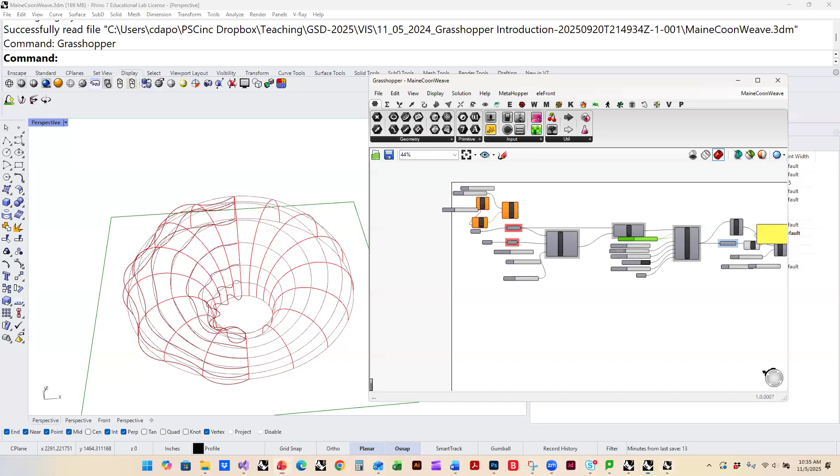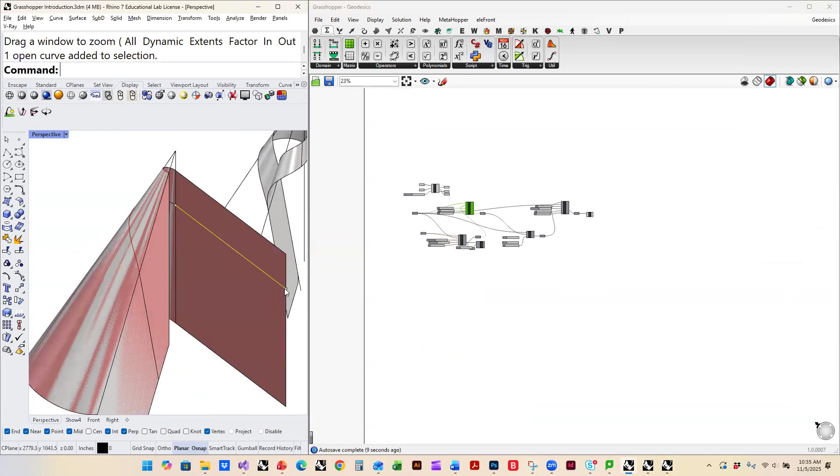But just so you know, as you're looking into this, we do have certain tools that will help you in that regard. For example, we have tools that will do this sort of thing. This is like a long strip of joined surfaces, and this is a tool that is mapping the geodesic tangent curve dynamically on it. So you can make sort of geodesic strips in that way.

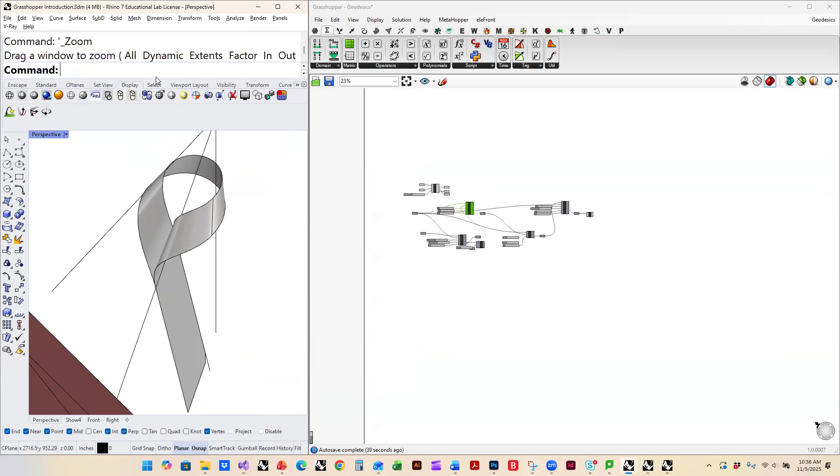I don't think you need this yet for your material test. The difference is if you're using a big sheet material and cutting it into a funny shape, it unrolls into a funny shape. That is a different process than if you're using a linear strip that rolls up on itself. So we have these tools. We also have tools that will map skinny strips onto surfaces. So it's a new type of model.

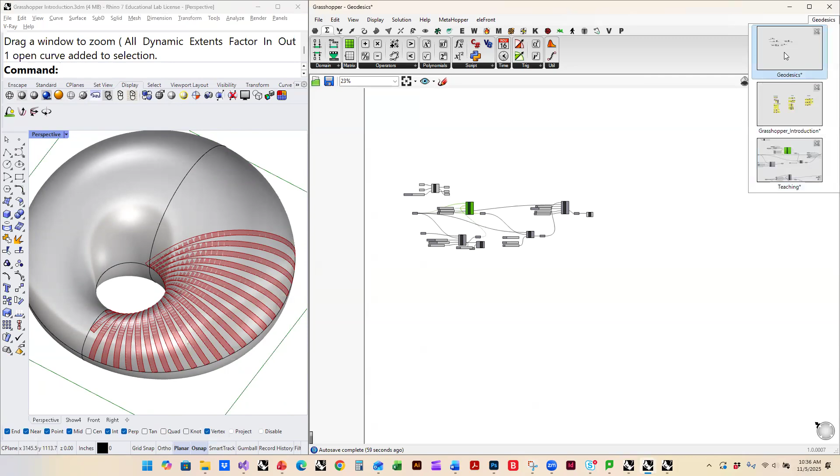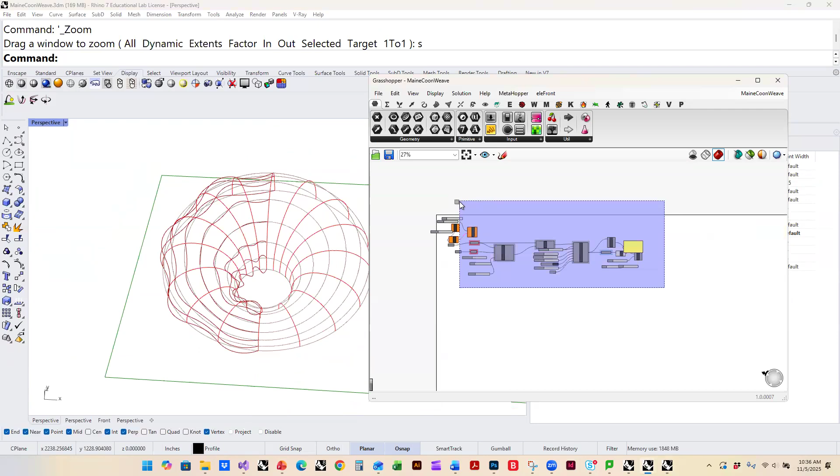And we also have another tool here. If you have something like this, which is a principal curvature panelization of an asymmetrical torus, I have tools that will take a set of curves in one direction and a set of curves in the other direction, and they weave them throughout each other so that we can make spatial woven models like that. We can make models where we have two things weaving amongst them and predicting the length.

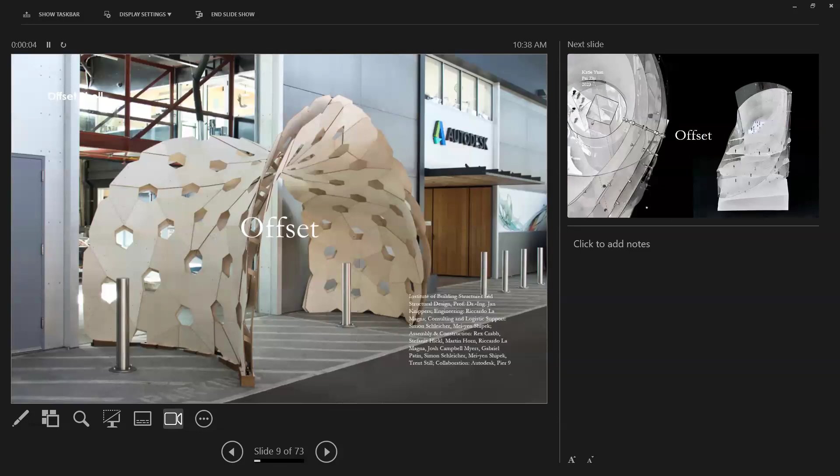So I don't think any of that is necessary yet. It requires the next step of the computational thing that I want to go through with you. But if you're working with skinny material, we do have tools to support you rather than only the sheet material. Okay, so that's that. And as I was saying, just a reminder to go back to that lecture and look at the paradigms as you're thinking about what you're working in. They are really detailing vocabularies, things that your predecessors have done, so that we know somewhat how things are going to respond.

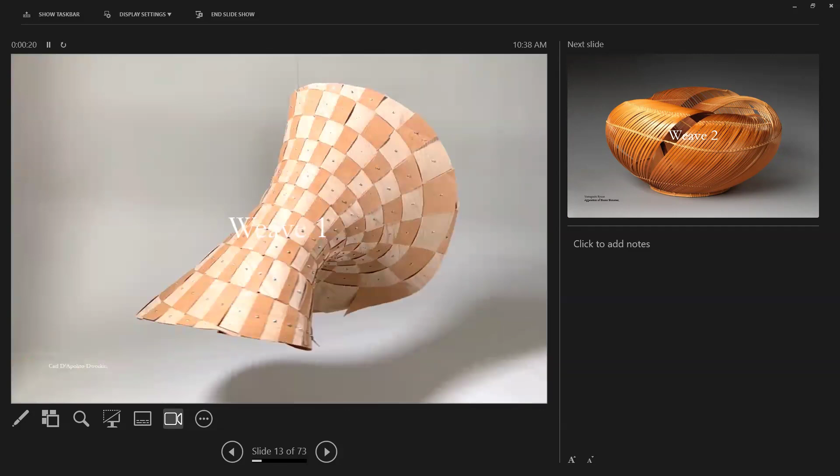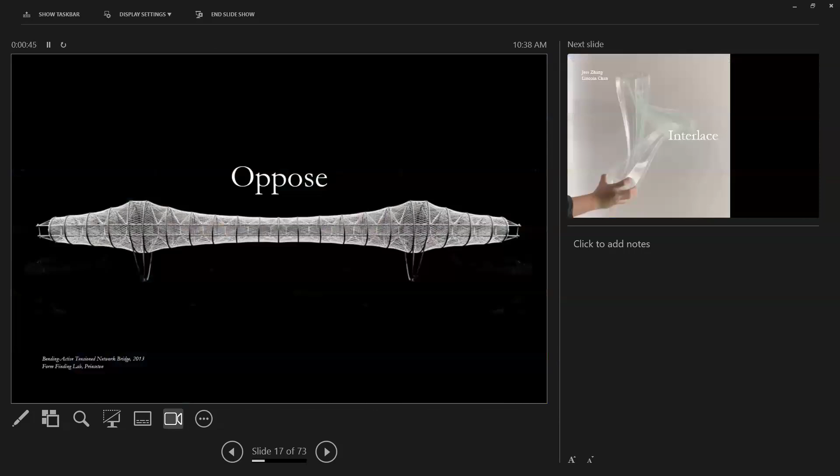In the weaving paradigm, there are really two kinds. One is this kind: strips that widen and shrink, made using the principal curvature. The other kind, which we've never made models in but which is the traditional kind, is where the strip is of a single width. That is a new kind, and we need the tools that I've just developed for that. So just a reminder, these are the various paradigms, and you should be responding to and working within one of those particular paradigms. Okay, that's my brief introduction.

Okay, so now please download the Grasshopper introduction and the Grasshopper modeling file. Just a tiny bit of background. I'm a competent, and also very amateur, mathematician and programmer. I'm entirely self-taught. Some of you have had courses in this, and if I say something that is wrong, I'm perfectly happy for you to interrupt me. A few of you I know have background in this.

That's fine. When I was a little boy, I studied programming a lot in my spare time, and I forgot all of it by the time I got to graduate school. But this one concept has been important to me in understanding what was going on: the idea of object-oriented programming. Most of the languages that we use, C++, Java, C#, Python, are OOP languages. They work around the concept of classes. You write a class, and a class has properties which store data, and methods which act on the data, and it hides its internal functionality from everything else.

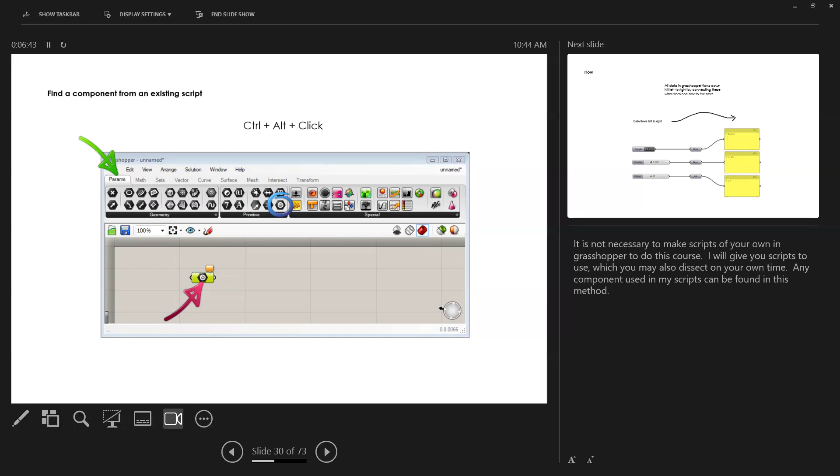Okay, so this is, of course, the interface. You've all seen this a million times, but one thing that I think is useful is if you go Control-Alt-Click, it will show you where a node came from. The file that I gave you today is almost everything that I use on a daily basis. And if you want to find it, you can Control-Alt-Click on it, and it will show you where it is, okay?

And then the other thing, many of you know this already, everything flows from left to right. And there are certain parts to a script, which in Grasshopper I think are called parameters and components. That would be analogous to the properties and methods. A parameter stores data, a component executes some kind of a function. There are inputs and there are outputs. And really, Grasshopper, when it was first developed, used to be called Explicit History.

So really, it is just a duplication of all the Rhino functionality in a more explicit way. So essentially, you're not really learning to code, just learning to do Rhino all over again from scratch. Okay? It's just a completely duplicate version of Rhino, except now all of the steps are recorded.

So if you want to make a sphere, when you execute a command, you click somewhere and then you type in a radius. Same thing. You have to click somewhere. The point is the place that you would click. The radius is 100. And so you just have to look at the inputs, and those inputs basically match up with the steps you would take when you would execute a command. So you just have to relearn all the commands.

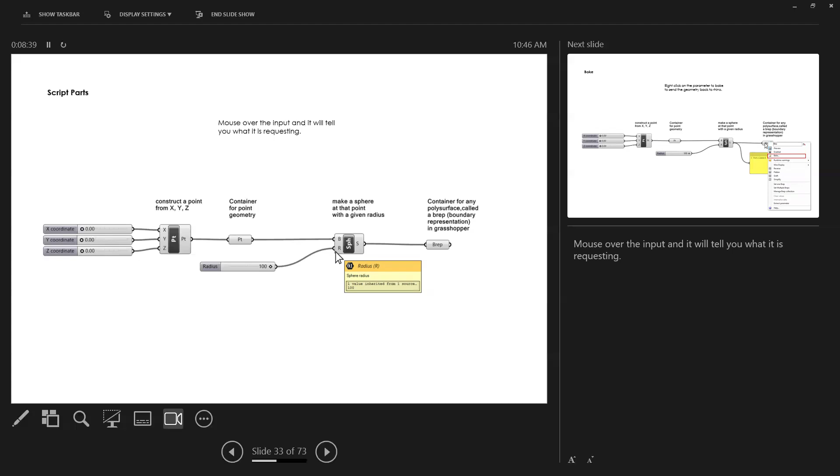And sometimes when you execute a command, you execute it very intuitively. You don't really know all the steps that you're doing. And now you have to know all the steps that you're doing, and you have to get the information that you would need to do it. And if you mouse over one of the inputs, it will tell you what it's asking for. It's asking for the sphere's radius, and it'll have this little icon which tells you what kind of data it is asking for.

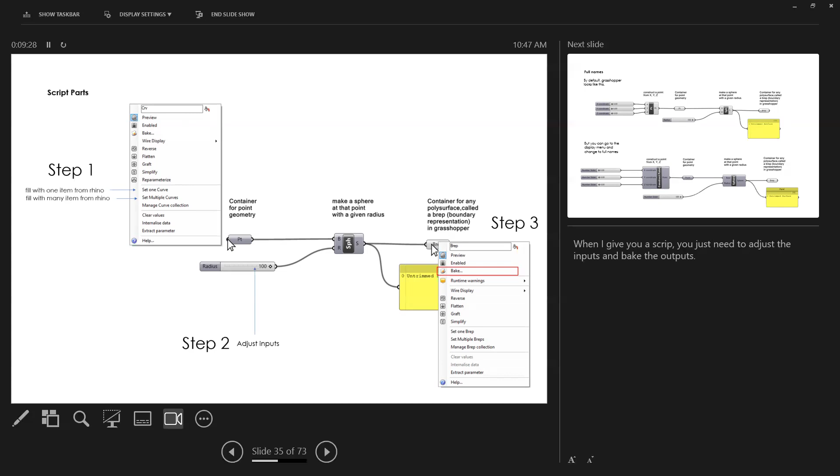And then, you bake things out, or you right-click on a parameter. Parameters will either take information generated by Grasshopper, or they will take information from Rhino. Once you put something in a parameter, Rhino and Grasshopper are totally separate. Rhino has data. You take one of those data, load it into Grasshopper. Grasshopper does a bunch of shit. Then you export it back to Rhino. So the Rhino model is just there to load some information into the Grasshopper process. So you can right click on this and you can set one, or you can set multiple into the parameters. Okay. So that's basically how it works.

So I do this long Rhino tutorial, which I've been doing for decades. And it's very similar to this, although I've tried to do this many times. Sometimes it gets confusing. Please interrupt me. Please try to follow along. I will try to go slow.

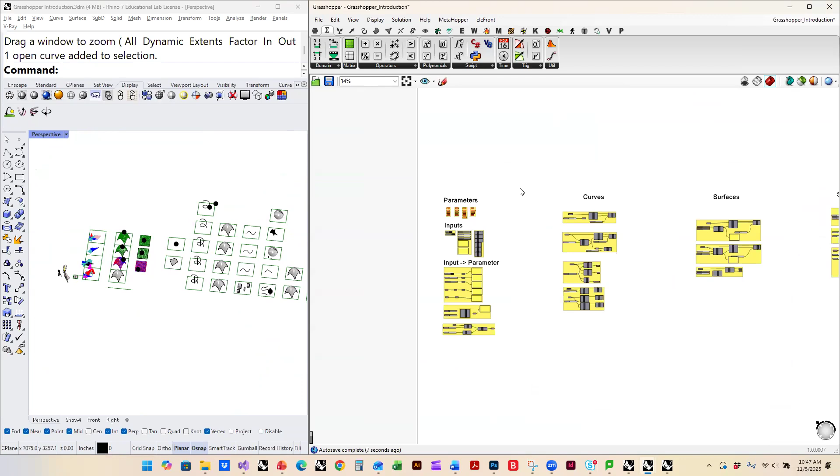Okay. So in the Rhino file that I give for my Rhino tutorial, there is just every command that I use. And this is sort of the same, but not the more complicated things. This file is just all of the nodes that I actually use. So if you alt control click on one, it'll show you what it is. Okay. So these are the parameters.

There are these number parameters: a Boolean, a true or false, an integer, obviously, this number, which corresponds to double numbers in computational language. It's a real number with decimal points, 0.11112 or whatever. And then a domain, which is a range from something to something else, 0 to 100, 0 to 2 pi, a range.

And then there are geometry parameters, and those are split into two categories. There are the ones that are more mathematically defined, like points, vectors, planes, and lines. Those have a simple mathematical definition, and Grasshopper tends to be fast working with them because they don't require a lot of data. A point is really 3 numbers, an x, a y, and a z. A vector is also 3 numbers, an x, a y, and a z. A plane is 6 numbers. It's the normal and the location.

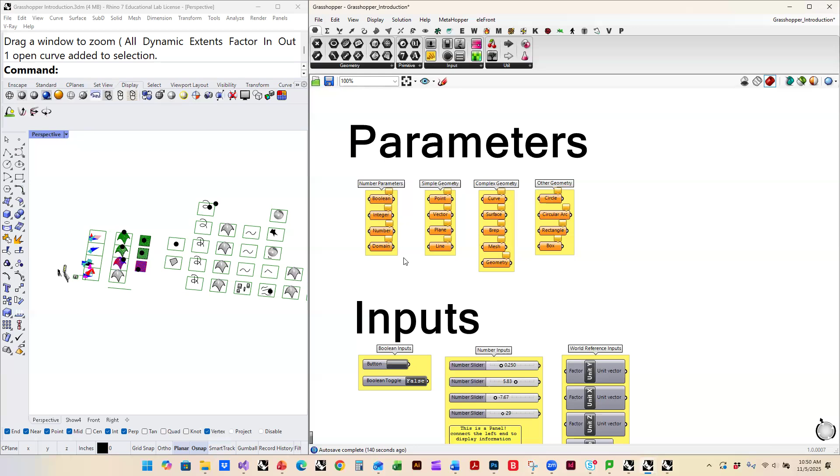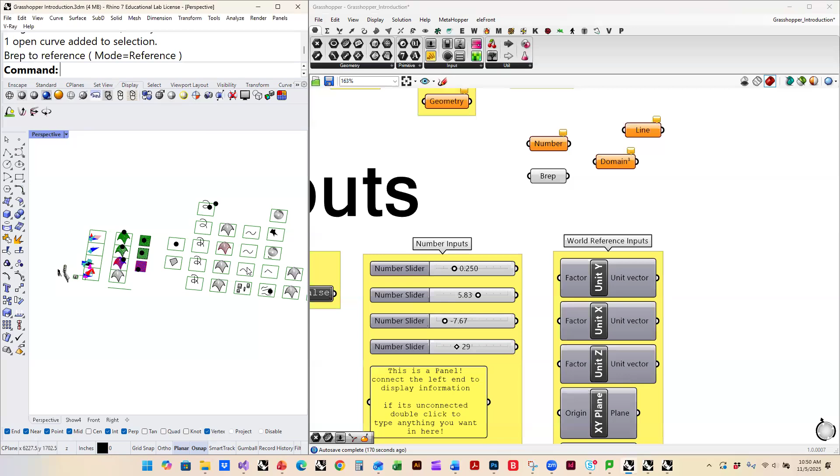Okay. Then there are inputs. So when you want to make something, you just double click and type it in. You say number, domain. There's a lot that come up though. So line, sometimes you get the wrong one. You have to know which one you're looking for. Brep, and they come up. Okay, and these are the things that you right click, set one brep, and load it from Rhino. And so these are the parameters, and they are the ones that get data from Rhino.

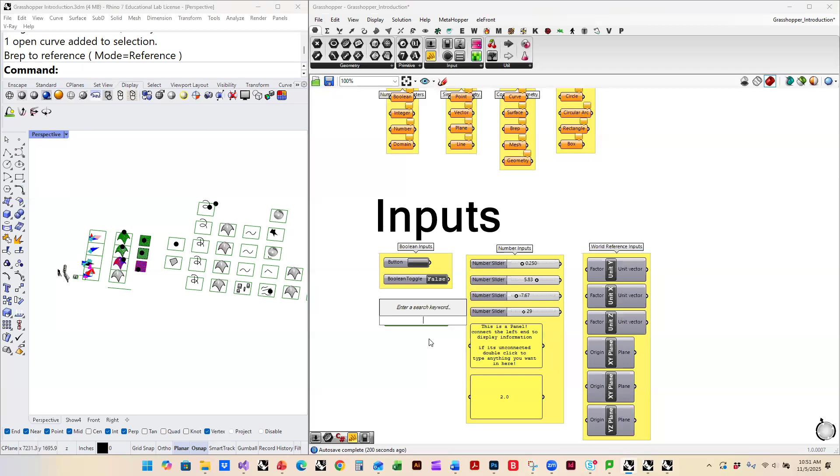And then there are other kinds of inputs that come directly from Grasshopper, and these are the only ones that I ever really use. There's Boolean values, true or falses. They turn things on and off. So if you type bool, you'll get this Boolean parameter, which holds a Boolean value, or the Boolean toggle, which can input a Boolean parameter. So if you double click on this, and then there's also buttons, which instantly turn on and off.

And then over here, these are kind of the world reference coordinates. So the unit X, the unit Y, the unit Z, the unit XY plane, the unit XZ plane. I use these a lot because they're helpful shorthands. If you want to move something vertically, you would need to get the world unit Z. It sort of maps onto when you type into Rhino move vertical, you need a reference. And then those are just if you type unit X, unit Y, or world XY plane, XZ plane. Okay.

And then there are the number inputs, which are typically in sliders. So if you type number slider or it's slider, I don't know. I don't usually access it that way. I usually just type a number like 10.00, which will give me a number, or if I type an integer number like 25, it'll give me an integer slider. And if I right click on this and go edit, I can change the maximum and the minimum, and I can change whether it is a real number with decimal points or whether it is an integer without them. And I can also change the number of decimal points that it will store.

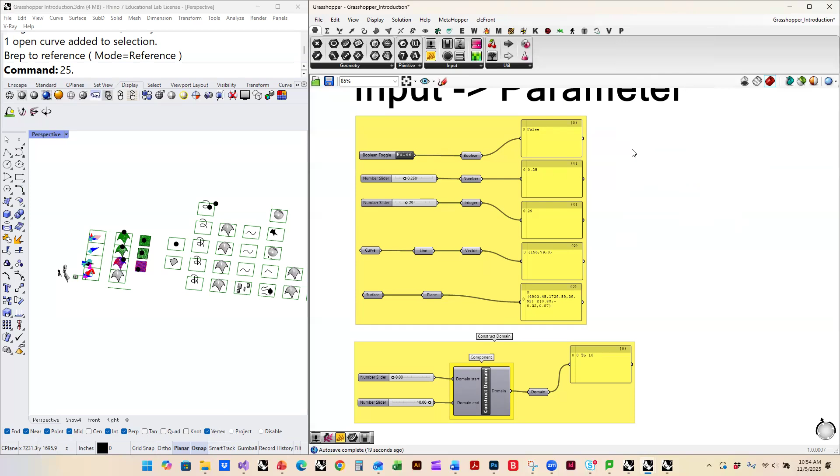And also, sometimes it will cast things automatically for me. Like if I draw a line in Rhino, and then I make a curve, and I put that line into the curve, because this is a linear element, it will let me cast that to a line, and it will also let me cast it to a vector. So sometimes that will not work. If it doesn't work, it will give you something red. And then if you look in this, you can see it's changing the data type as it goes along. This is a referenced line-like curve. Here's a line. Here's the vector that came out of the line. Some things you cannot do that with, and sometimes the casting is automatic.

So this goes back to what I was saying before. A curve is a type of object of class curve. A line is a different type of object, and changing one into another is called casting. When you're writing programming, you cannot cast anything very easily. When you are doing Grasshopper, a lot of that functionality is already built into the program.

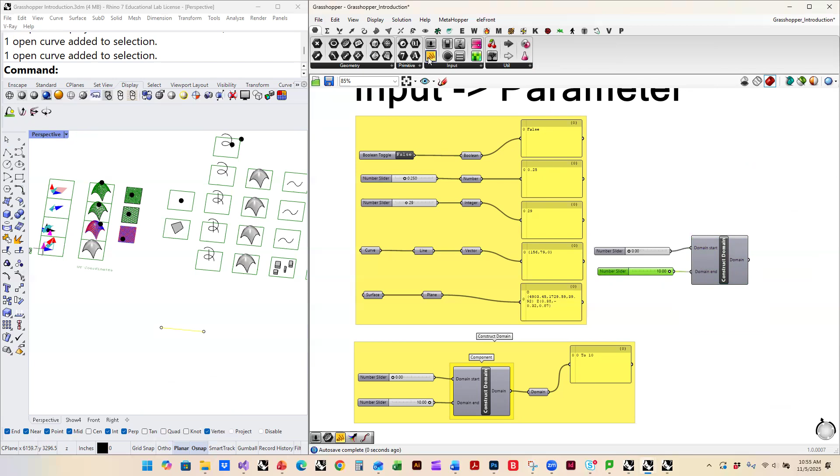If you want to make a domain, you would do domain. There are many kinds of domains. I want to do a 1D domain, which is this one. And then it asks me for a start and an end value. So I would type 0.00, and I would type 10.00, and I would put that in. And then if I look at the output, it will tell me it is 0 to 10. These domains tend to be very, very helpful.

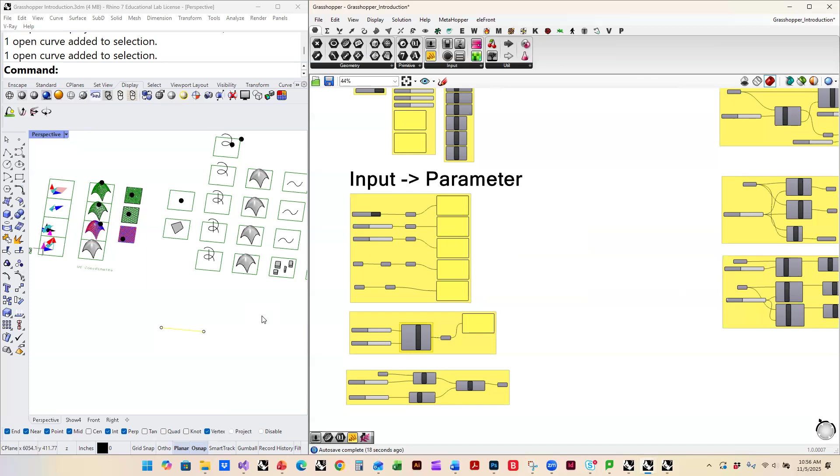If I wanted to model something very basic, let's say like a sphere, I would start with something from Rhino. So if I type sphere, there's the command for sphere. There are many different kinds. They correspond in many ways to the Rhino commands. This would be the sphere center point. That would be the sphere 4-point. They're very similar to the Rhino commands, although not identical.

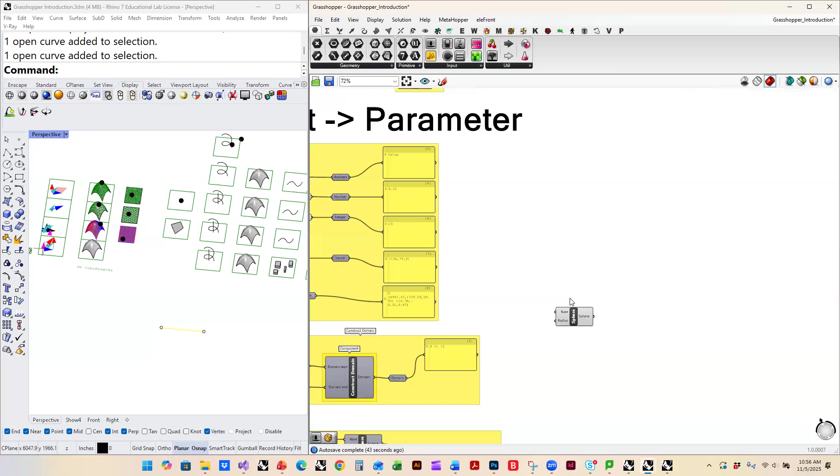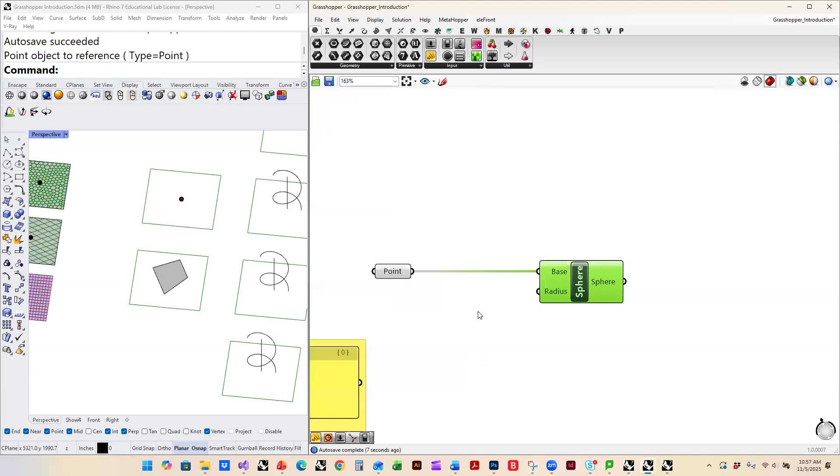There, it's asking me for the radius, and it's asking me for the base, which is by default the world XY plane. But I could type point, and I could choose a point from Rhino, and then I could move that into the base. It will automatically cast it to be the horizontal plane. If I wanted to specify a plane, I would have to do something else. And then I type a radius like 100, and I put it in here, and it does that.

Okay, so basically I need to look at what inputs it's asking me for, and I need to figure out ways of getting them. I could get them in some other way. I could build a point in some other way, or I could take a point from something else. Like, let's say I have this curve already in Rhino. I could do endpoints, take the start point, and then build off of that.

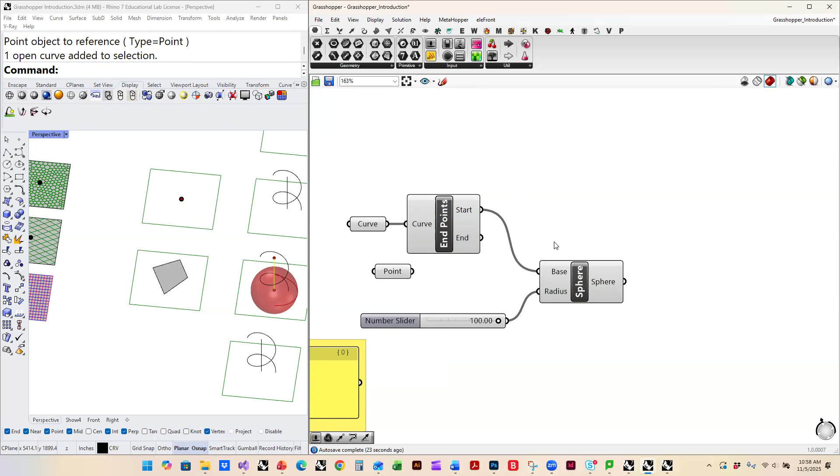So I need to find some way of getting the inputs for each of the commands that I want to do. And the way that I set that up has a lot of influence on whether or not what I'm doing is at all useful for me. It gives me control over what I am doing, basically how I set that up.

So the rest of this now is divided into a variety of different sections: curves, surfaces, series and range, selecting, vectors, planes, transformations, and polysurfaces. These are all of the basic commands that I execute on each of these different things. So I'm not going to get through all of this today, but

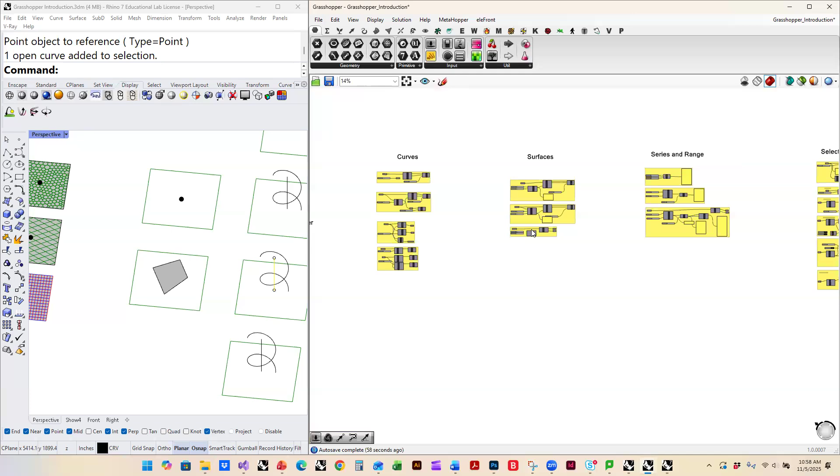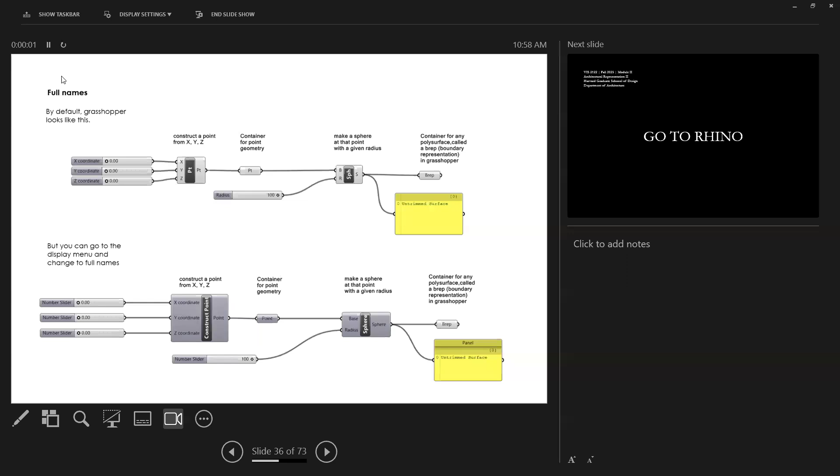very importantly, one other concept that is essential is, I think, thinking about parameters. Okay, so this word parametrization, or the word parameter, has many different definitions and is used sort of interchangeably. But essentially, this idea is extremely important. A surface is actually a map from 2D to 3D space.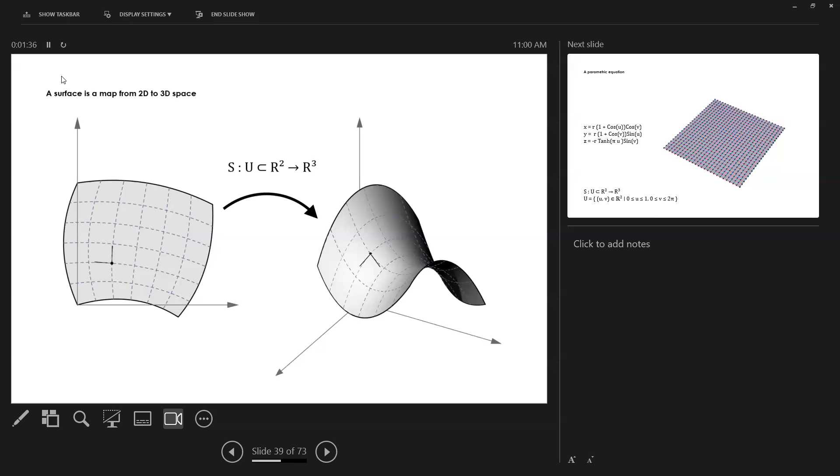So that is what a parametric equation is, okay? It is a map from 2D onto 3D. It is a way of mapping information. The U and V coordinates are 2D coordinates mapped into 3 coordinates in space like this. So U and V are the parameters of the surface. And this is a parametrization of a surface. U and V are 2D coordinates that give you a position in 3D space through this function.

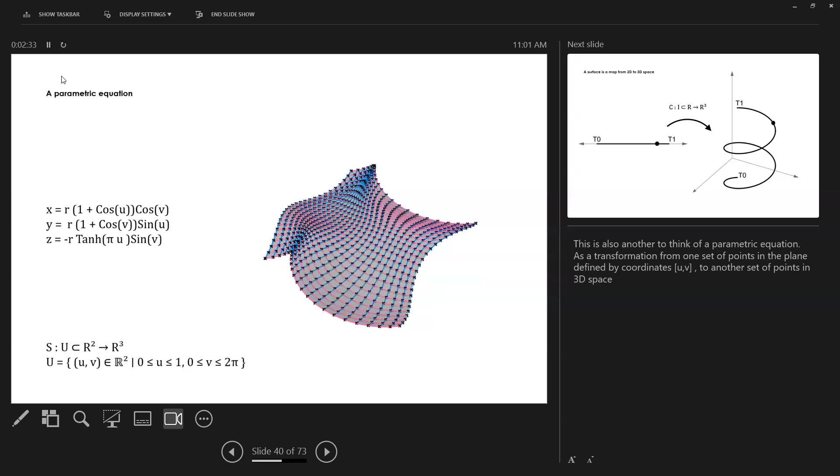Okay, I don't know if that doesn't make sense. It's fine. But it's very important, and we return to it again and again. This is the fundamental idea. U and V are coordinates in the 2D universe of the surface. And then the surface is embedded in a 3D universe. And the same is true for curves. Curves are a map from a 1D universe into a 3D universe.

So curves only have one parameter. Instead of U and V, they have T. And T has a domain. It includes some set of numbers along the number line. And that is mapped into 3D space. So if you want to know the position along a curve, you just need one number, the parameter, to find a position. So this is a parametric equation for a curve. It is based on one parameter rather than 2 parameters, U and V.

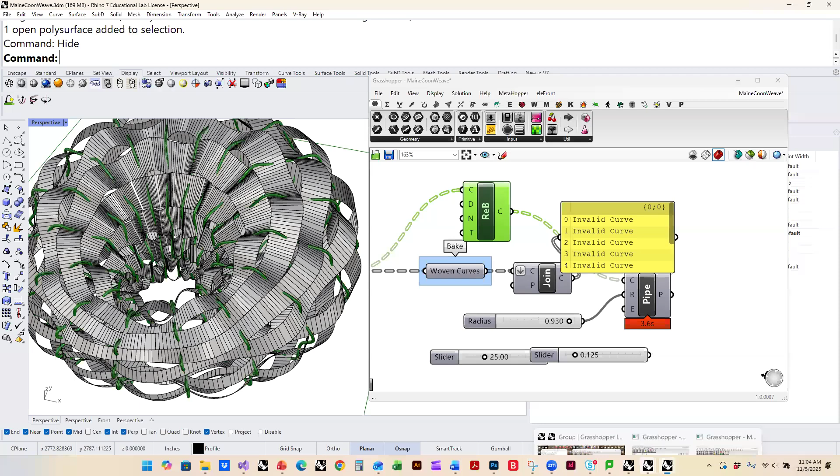It will not show the numbers. I wrote the numbers on this slide. It's very, very useful. One of the things that is weird about Grasshopper is you kind of have to learn some funny things that don't seem that useful.

But if I take a curve, let's just do this. I go curve, set one curve, and then the thing I always do is evaluate curve. This will take the curve and it will take a parameter. So let's put a parameter in here, 1.00, and drag that here. This now gives me a point and a tangent along the curve. This is almost always the first thing I do.

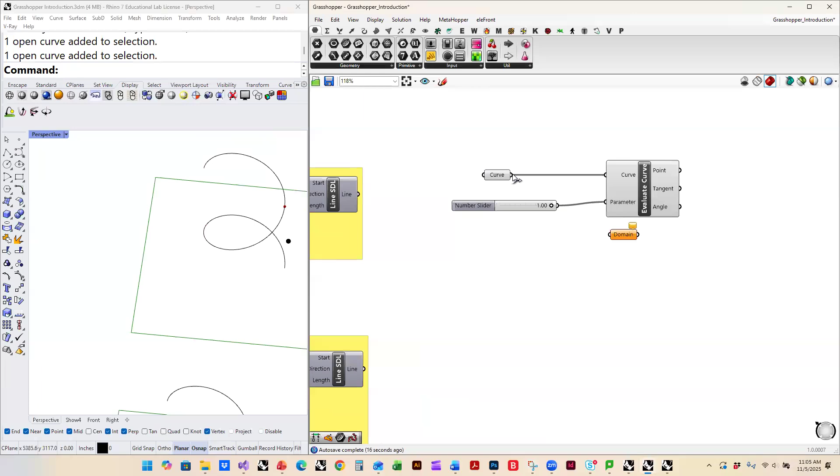But if I drag this slider, it didn't get to the end of the curve. It went from here to some random point. That's because of the addresses of the curve: if I were to type domain and look at it in a panel, it's from 0 to 1.5. If I click reparameterize, now it's from 0 to 1, and this will go along the entire curve.

So if I wanted to make a sphere along this curve, I could give it that point, give it a radius, and drag this along. Otherwise, I don't know what numbers to enter in order to find a particular position. This reparameterization, by the way, is slightly inconvenient because certain areas of the surface will, yes.

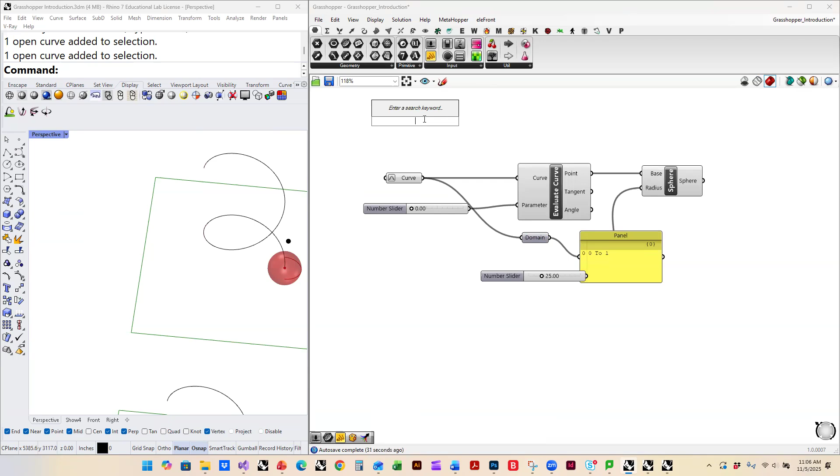Thank you. I just double click and I type. Please, it is not humble, it is heroic, because everyone needs you to ask the question. Nobody wants to, okay? So yeah, you just double click and type a thing in, which is tantamount to entering a command in Rhino and letting it try to guess what you're trying to type. It is a completely analogous process.

You right click on it and go edit, and then you can change the maximum, the minimum, the kind of number. N is an integer, R is a real number, and the number of digits is the number of decimal points that it will hold. If I were to type a bigger number, it will automatically try to guess what range of numbers I'm interested in.

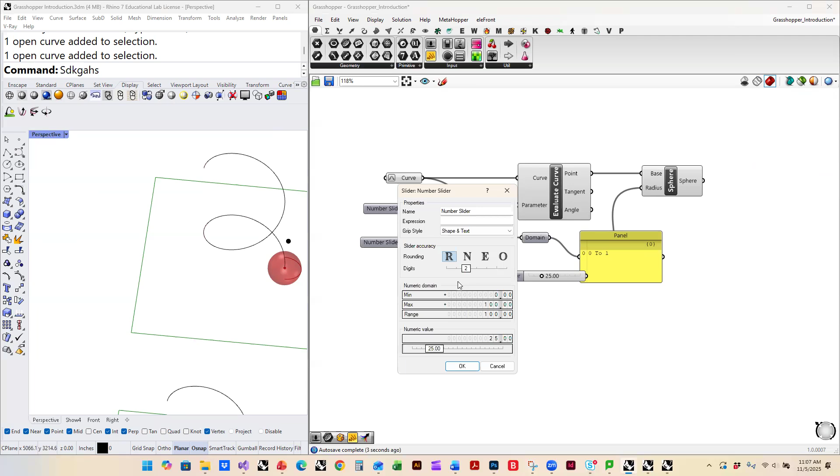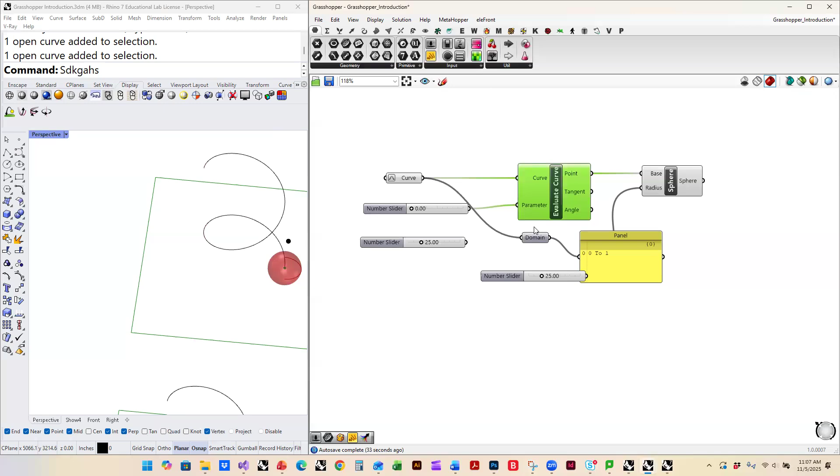So this is the main idea. This idea of parameterization is the fundamental concept. When you were working with parametric equations, that is what they were doing. They were mapping a certain domain of 2D space into 3D space, giving you an address signature on the 3D surface for all the points. Okay? And for curves, it's 1D.

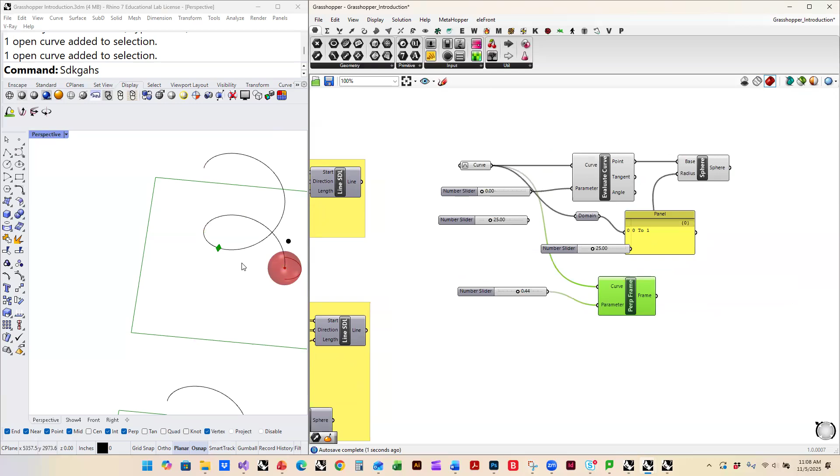And there are others that I use. I also use this perp frame, which also takes a parameter. The perp frame component gives me a little plane perpendicular to the curve. There's also the curve frame component, which gives me a frame, a little plane lying in the plane of the curve, like that.

Then I will also often use this tangent. If I want to draw a line that is tangent, I always type SDL, which stands for start direction length. It's a way of drawing a line. The other way is the basic line, which makes a line between 2 points. This uses a direction and a length.

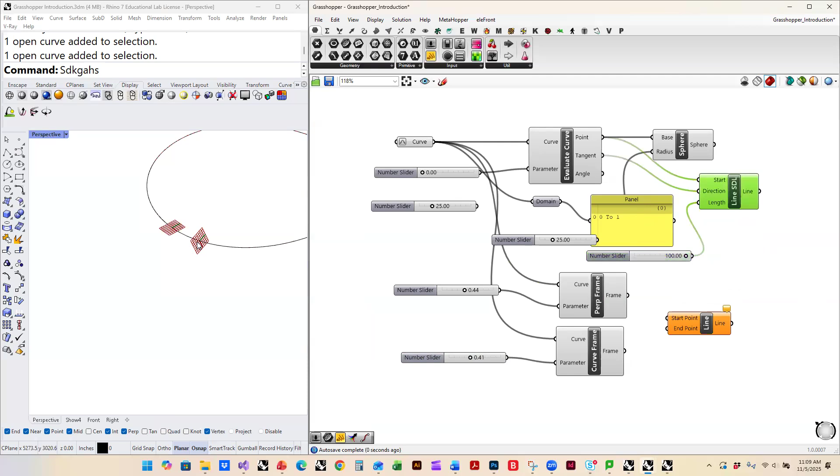I will take the start point, take the tangent, and also put a number slider in, let's say 100, into the length. Let's turn off this sphere. If I want to hide something, I can middle mouse click and put the little blindfold on. And now you can see this is a tangent line to the curve.

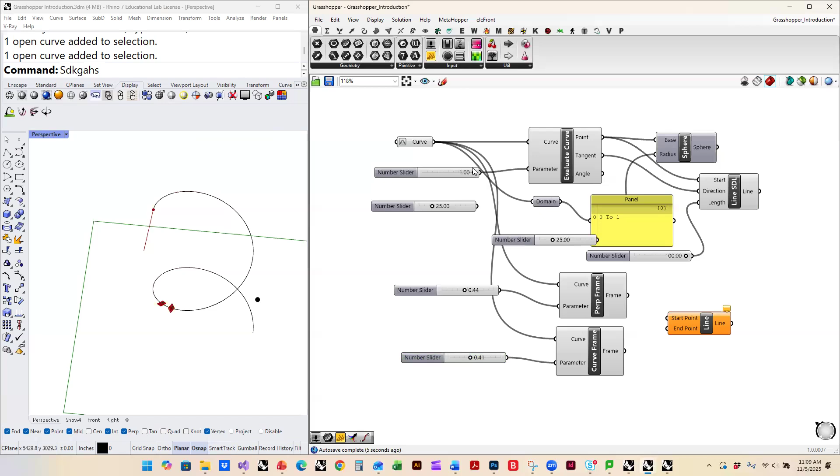That is line SDL. It takes a vector, the direction, start, a point, and a length, a number. And it produces a line. And because the line was created, the tangent is being evaluated by this curve evaluate component. It's tangent to the curve.

Another thing I could do is divide the curve into a certain number of points. So let's clean this up a little bit. That would be this divide curve. There's a bunch of them: divide curve, divide distance, divide length. They have different things. Divide curve.

If I mouse over these things, it says it takes a curve, takes a number of segments, and then this is often unnecessary. So I'm going to drag the curve in here, and you can see it created a bunch of points. And if I change that number, let's make 25, it'll make more points. And this gives me some different outputs: again the points, the tangents, and it also gives me the parameters.

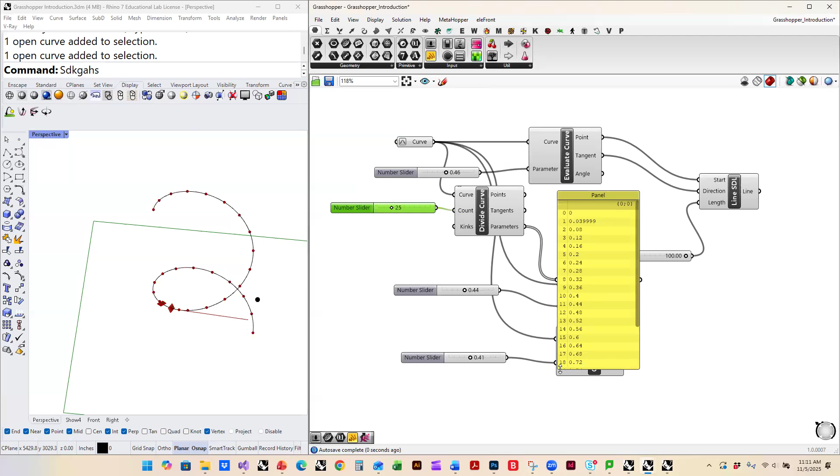So if I look in those parameters, they will give me a long list. So there they are: 0, 0.08, 0.12. And so that is how I made that other diagram. I just took them from here and wrote them on there. And if you wanted, you could use all of these parameters to do one of these other components. I could drag these parameters over here into the curve frame, and it would do the same thing. Yes.

I just go delete. The delete key. Although, by the way, sometimes it breaks and it won't do it. And I think there's a delete button somewhere. Does somebody have it? I'm just doing delete. I feel like there's a delete in the menu. Here it is, delete. You can delete that way too.

Okay. So what's useful about Grasshopper is that rather than me having to execute the command 25 times, it runs this component on every single number that I give it simultaneously. It does the same functionality that it did on one number, but on all of them. And this is what's called a list. The hard part is getting the lists to match up with each other. It's very confusing, and causes things to crash because it's trying to do an operation 25 times.

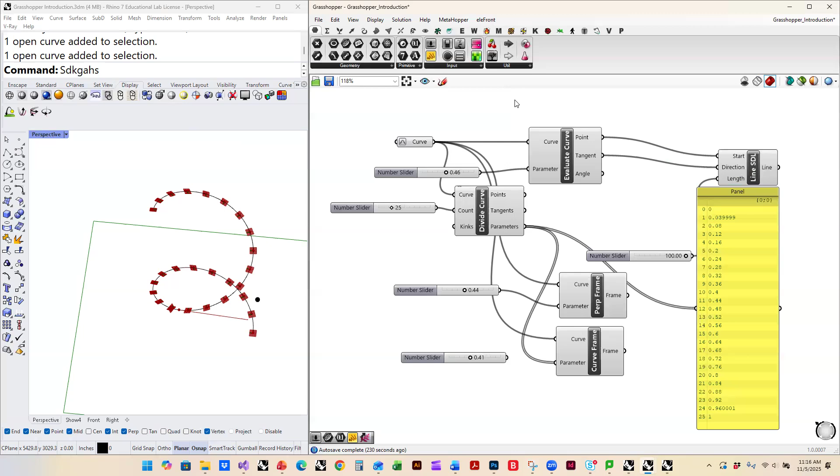So I know that it's the same as if I were to click on a point and then drag and type a number. This way of entering a line is a point, a direction, and a number. So it's a different way of entering the same information.

And that's why, by the way, when I was a student, I never used books. I only used it in practice because I needed to do things very quickly for competition. I needed to model hundreds of railings for a rendering model in a competition. And so I just started very small, like I'm just gonna automate all the mullions in this rendering. And then over time it becomes very familiar.

So I think if something is extremely laborious and kind of a basic modeling task, that's a good way to start. That's why what we're doing in this class with modeling bolts on surfaces, I think, is much easier than trying to model a parametric building. That is much more elaborate.

Then the other thing I would say is that there is a small aspect of Grasshopper that is not just modeling, that has to do a little bit with coding. I wish I had my pen, but in programming you call it pseudocode. It's a little algorithm of what are the steps that I'm going to follow. So I could write that out: first divide the line into points, then get the tangent from each point, then extend that linearly by a certain number. That would be the pseudocode version.

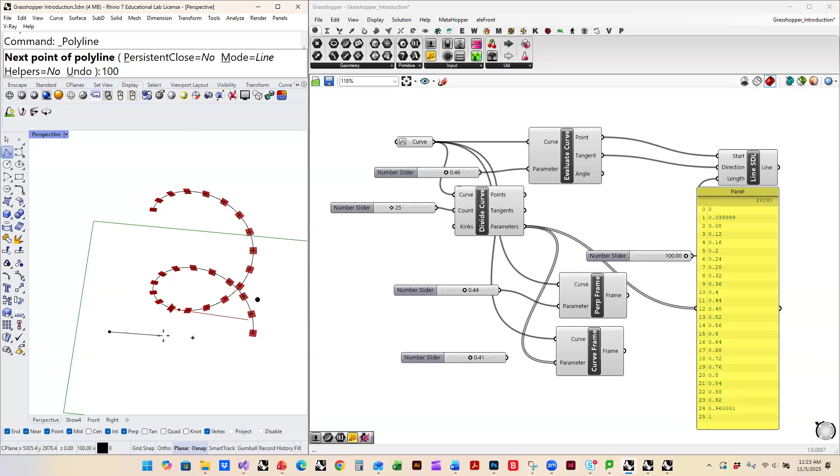So this is the same command, line SDL. I can't help you with doing the algorithms, but you will get familiar with it just the way you're a master of Rhino, and some of you didn't even use it a couple of months ago. Same thing will happen again. Okay. Great. So what else is down here? I think that's it, except there are a few other divides.

There's divide curve, divide. Oh, in terms of the things to know, I'm putting everything that I think is worth knowing in these files. In terms of the number of commands and the little widgets and buttons, most of them are unimportant. In software, usually 99% of it is unimportant, for very special cases. Most of the things that you repeat is a very, very small subset of functionality. So there's divide distance and there's divide length.

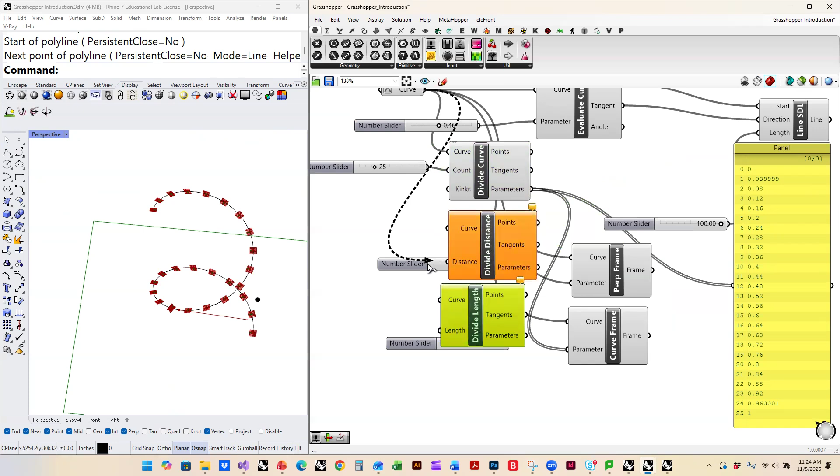Distance is equidistance. It's the straight line distance. Length is the length along the curve. And divide curve is a specific number. So if I were to divide length, it would ask me for a specific length, let's say 15.0, and I'll get points that are spaced 15 units apart, as opposed to a certain number of points.

So that is what I do with curves. Okay, that is basically it. I divide them, I evaluate them, and I get these perpendicular or orthogonal frames. The plane is useful because certain commands take a plane, other commands take a point, other commands take a direction. And so you basically sample the curve for certain information that you can then use in other components.

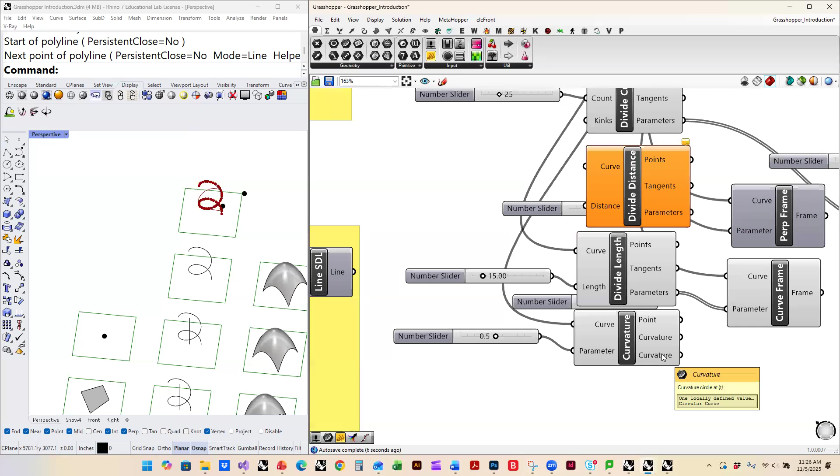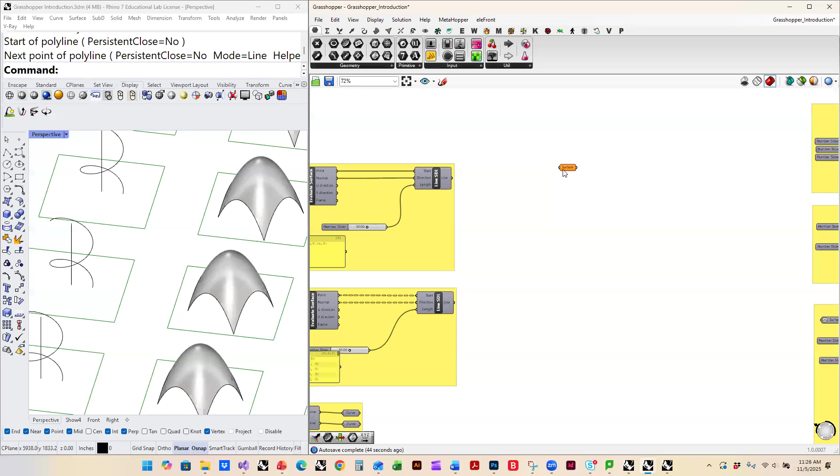Okay, now there are surfaces. Surfaces are very similar. Although there is also surfaces, take this surface thing. That is always one surface. If it's a joined surface, you have to use a polysurface, or what's called a B-rep. Okay. So if I put a surface in here, let's do set one surface. There it is. And then there's evaluate surface.

And this is the same thing. So I can also reparameterize a surface. Okay, because the surface, unlike a curve, takes two coordinates, but it's the same thing. So it's asking for a point. It says a UV coordinate to evaluate. I have to say this is always very confusing for people. There are no 2D points in Grasshopper.

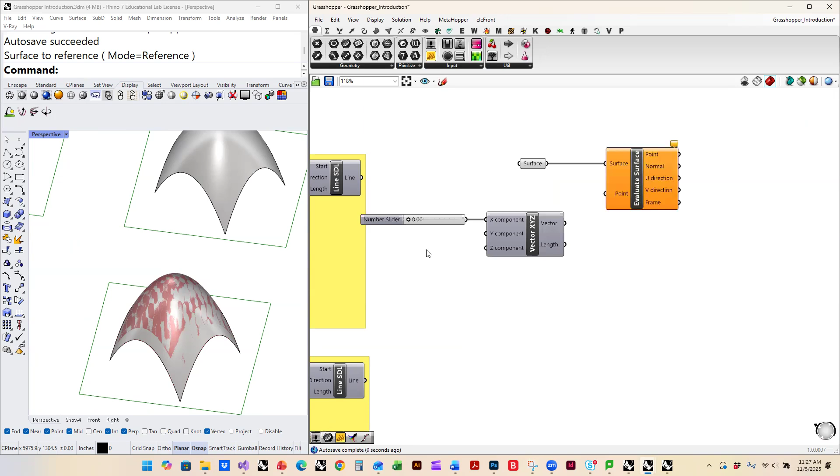So what we use is a vector. We just use a vector, and we ignore the Z component, and we just put numbers in the Y and X component. It's annoying. I wish it wasn't this way because we have to talk about vectors. And so if I put two numbers in here and then I drag this vector into the point, it will work. And the Z component is 0. So if you look at this in a little panel, it looks like this: 0, 1, 0.

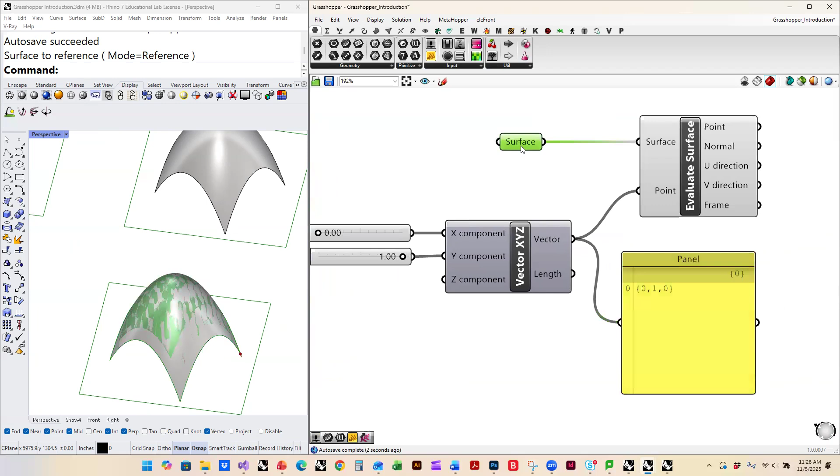A vector, you remember from physics, is like an arrow. In computers and in math, a vector is just a way of storing numbers. Just 3 numbers in 3D space or 2 numbers in 2D space. That's all it is, just a list of numbers packaged together. So this is how we're using it. And if you see, nothing's going to happen when I drag these around. That's because I haven't reparameterized this surface. But if I right-click and reparameterize it, now you can see it's giving me the coordinate signature of the surface.

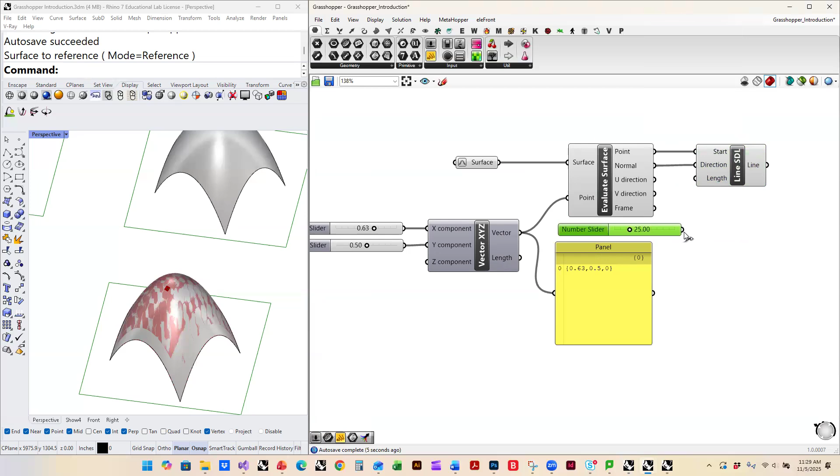So when I put points on surfaces, this is usually how I do it. And then it's giving me a bunch of information about the surface. It's giving me the 2 tangent directions, the normal, the frame, and a point. So if I want to draw a line here, I can again do the Line SDL. I can do from the point, the normal, and a length. And there's a little doohickey sticking out of the surface that I can move around. Yes.

The numbers are just the parameter. So they are the local coordinate space of the surface. They're its U and V domain. So because I went to reparameterize, they're from 0 to 1, 0 to 1. If this was not reparameterized, they would be random things. Let's see if I do a domain, if this will tell me the domain. I don't know whether that's the U or the V domain. It's probably the U domain.

It's just a random set of numbers. Really has nothing to do with anything. It's just whatever was assigned when Rhino created it. They don't have to do with distance. You can't rely on them. Maybe. Yeah, it could be. I have no idea why it's that way. It's not the length of the surface. If it's parameterized by length, that's what's called an arc length parameterization. Very great. But it's not that.

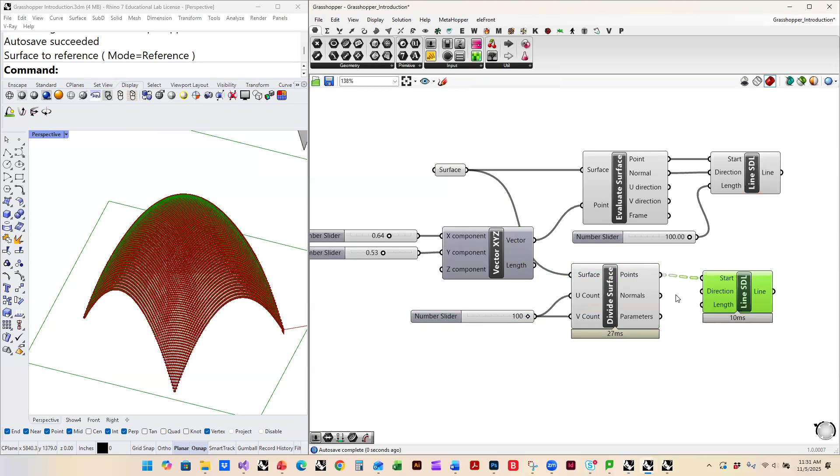Okay. So you can also divide surface, and then it will get you a bunch of them, just the same way we did before. I can make 100 of these. And then if I want all the little normals, I can make like a fuzzy surface.

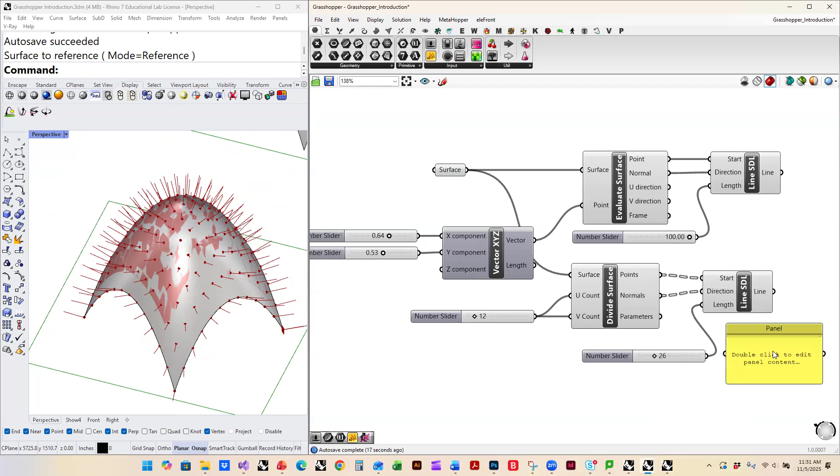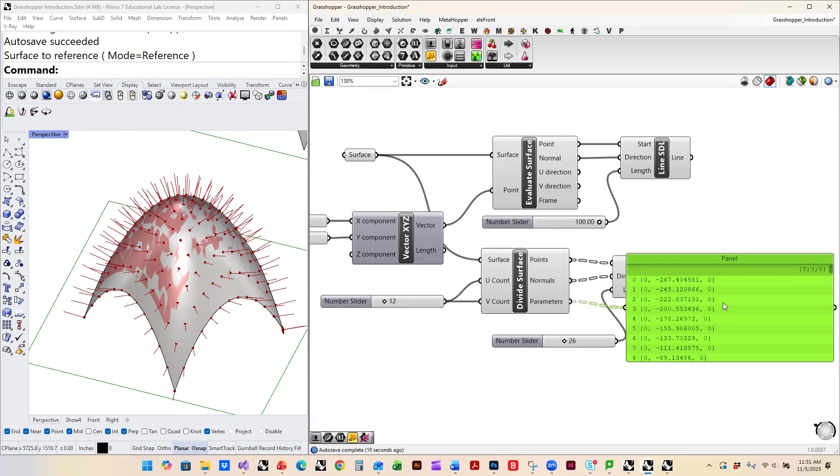Okay. Or I could take all these parameters, if I want the frame, which this component did not give me, it just gave me the normal and the points, but it also gave me the parameter. So if I look at those parameters, I do not have this reparameterized, right? All I have is the original parameterization, and this is returning 0 to 267, 0 to 245, negative. It's just returning the parameters. If I go down this list, eventually these will start changing. And if I put those in this component, it'll evaluate at each one of them and give me these little local frames.

And those frames are very helpful because let's say I wanted to model little cubes all over the surface. If I were to do something like box, it wants a base plane. Many things take a plane, and then it takes a bunch of dimensions. I think these are all domains, so it's super annoying. Oh no, it's just a number. Okay, so I could take this plane and put it in here, and then I can make these big.

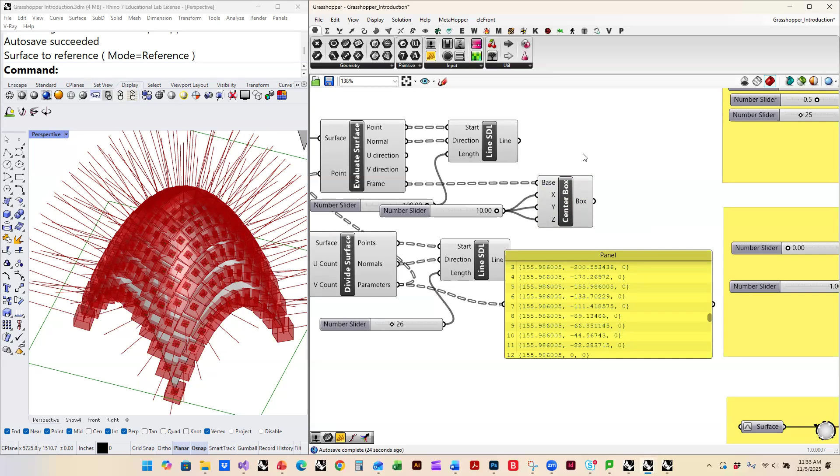And you can see they're all oriented with the circle because the plane is the normal plane, is the tangent frame of the surface. So it's always called a frame. I don't know why. The tangent plane in this land is called the frame. The Frenet frame. Okay. So that is how that works. And so yeah, this was divide surface.

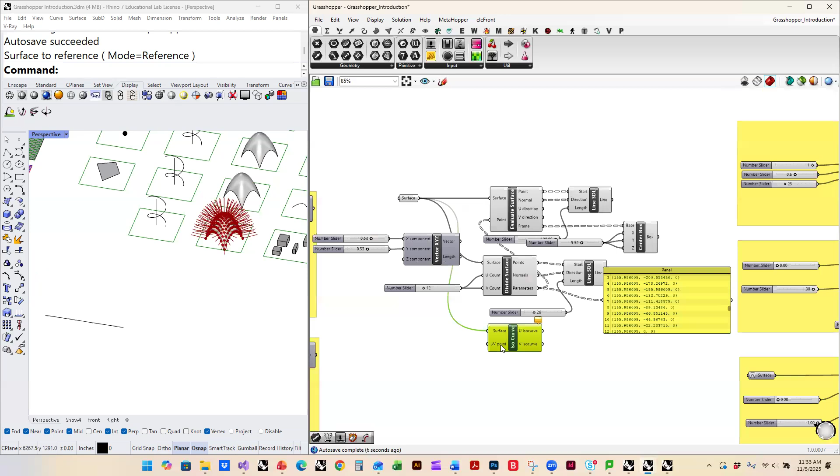And then if you want to do isocurves, you can do isocurve. And here, very annoying, it says UV point rather than point. Whoever wrote this was inconsistent, but it's asking for the same thing. It's asking for these UV points. So I could put in this vector, and because this isn't reparameterized, it's not giving me. So I can reparameterize this, and then you can see, let me turn all this off.

You can see it's giving me the U and V isocurve. And if I mouse over the output here, it'll tell me what it is, I think, which is just a curve. Okay, so then I could take that curve and put it in its own parameter, and then I could evaluate the curve.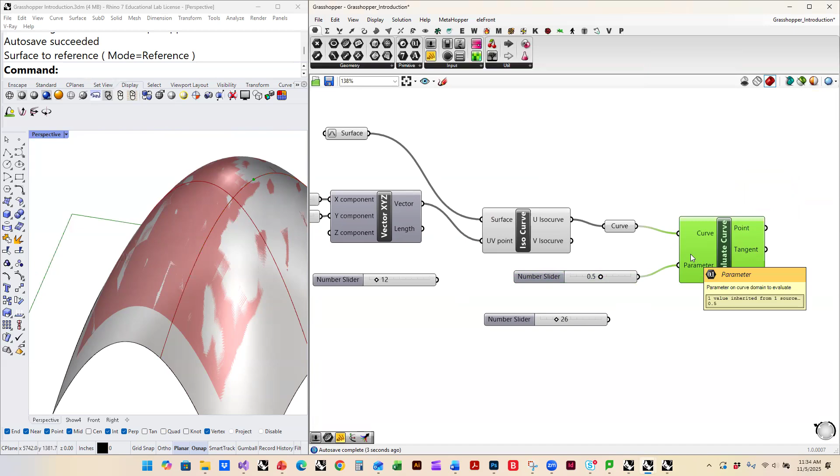Okay, so endless chains of data getting duplicated and passed to itself. Is that clear? And if I wanted to divide surface, I could get all of the isocurves that way. Okay.

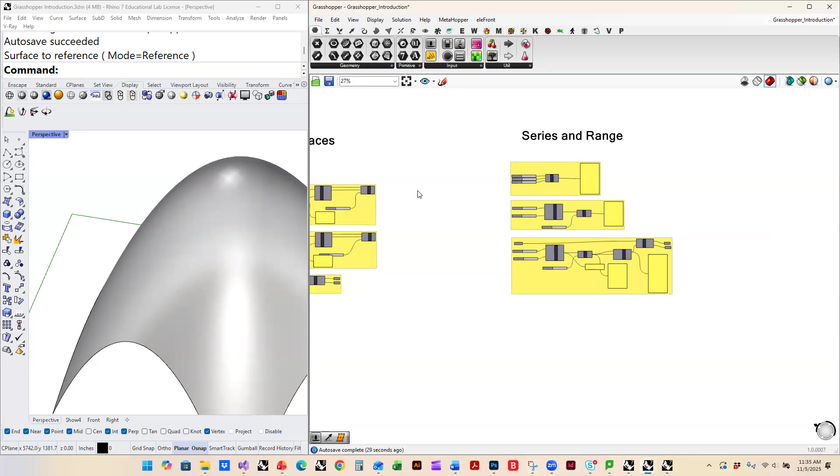There are two other... when I learned Grasshopper, every tutorial I went to started here with this stupid series and range, and I would always get bored and decide to put it away and come back later. These are just ways of making lists of numbers. I don't know why you want them, but they're very useful actually. So if you type series, there aren't any others. These are them. Series and range. This is the way. There's no other way.

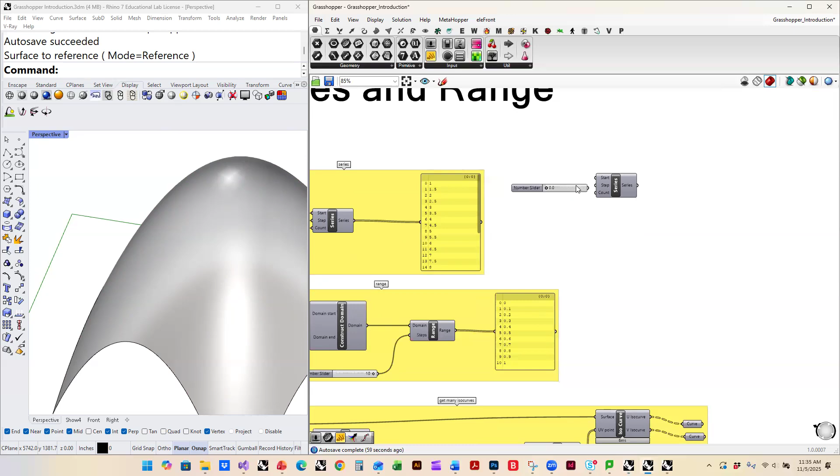So if you want a series of numbers, you need a start, a step, and a count. So you put like 0.0, 1.5, and 25. And that gives me 25 numbers from 0, counting by 1.5.

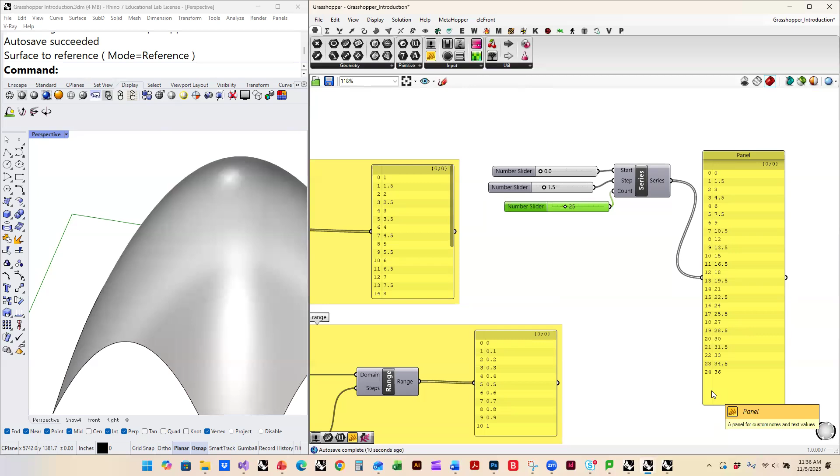And one thing that I think is very worth noting is for some reason, computers always start counting from 0. They never start counting from 1. So if you have 25 numbers, the last one will always be called number 24 because 0 is always included. It can be very confusing and often cause you to lose track of your things. This is 25 numbers from 0 to 24.

Okay. And then the other one is a range, and that takes a domain and a number of steps. So if I made a domain, which is what I did before, from let's say 0 to let's say 76.55. And then let's give it 25 steps. Now I have it just dividing down the domain into that many number of equal steps. And it's weird, it returns an extra number because it's dividing it into 25 parts rather than giving me 25 numbers.

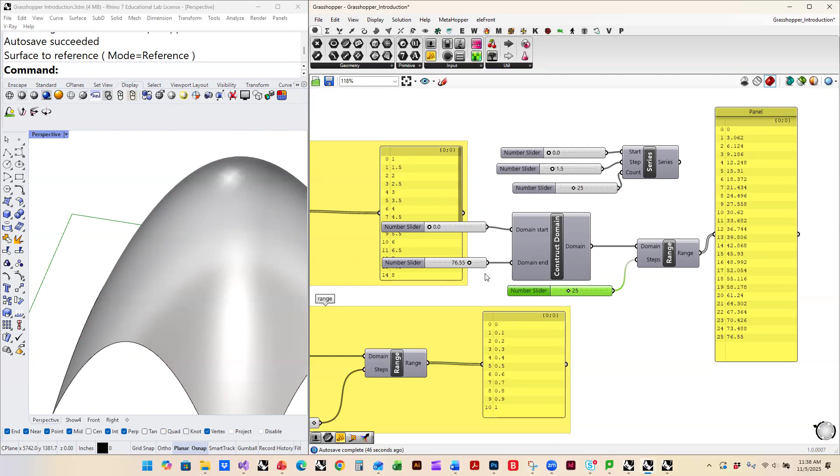Okay, so this is useful because let's say I wanted all the isocurves on this surface. The other way of doing it with points was actually giving me overlapping isocurves because there were too many points. Like if I have... I need a pencil. If I have a surface and I have a point here and I get this isocurve and then I have a point here, I'm getting the same isocurve twice. So if I wanted to get all the isocurves, I could construct it this way. I could construct my own mapping of the surface using this range.

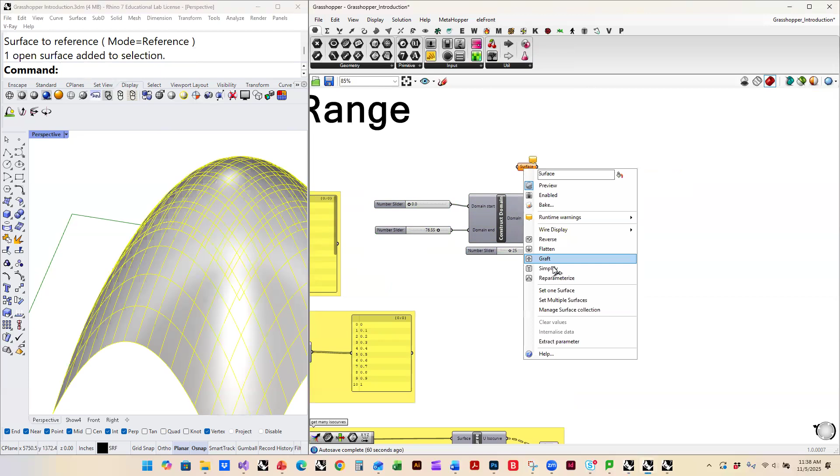I'm going to do a surface, set one surface, and then I'm going to do a vector, x, y, z. This is the same thing I did before. Whenever I need to construct a parameter, I use a vector. I always use vector x, y, z. It just takes an x component, a y component, and a z component, and it builds a vector. The vectorness is not important. It's just a list of 3 numbers.

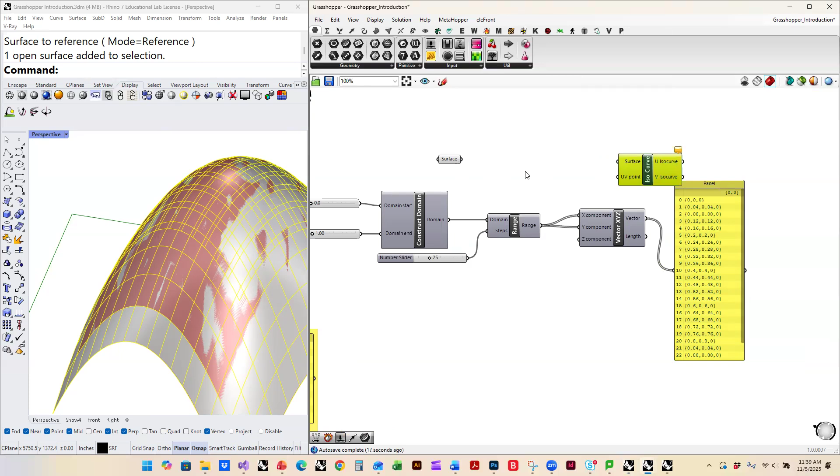So I'm going to put those into both the x and the y component, and I'm going to make this from 0 to 1. And now if we look at this, it is going to be returning a list of numbers where both the x and the y component are traveling from 0 to 1. And then if I do the isocurve, and reparameterize this, it's going to give me all of those isocurves.

So if I change this number, okay, that is because I'm constructing a list of parameters. Here I'm constructing 9 parameters, getting a set of numbers out of the range, and I'm using it twice for the x component and the y component to construct a vector.

I think that's confusing, by the way. It's confusing to me when I say it, but I'm just showing you why you might want to create your own range of numbers. It's just an example of creating your own range of numbers. I rarely access surface information this way. I'm just saying it as an example for how a range of numbers is sometimes used for a particular other thing.

Maybe a more salient example would be if I divided the surface down and I wanted to make every one of these normals a different height, I might need a range of numbers in order to do that. But in order to do that, it would require using a bunch of extra components. So this is just a simple example with components that I've gone over already.

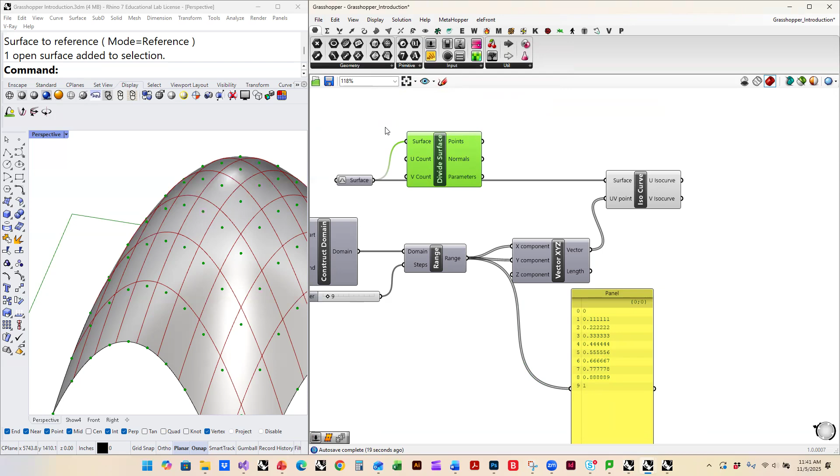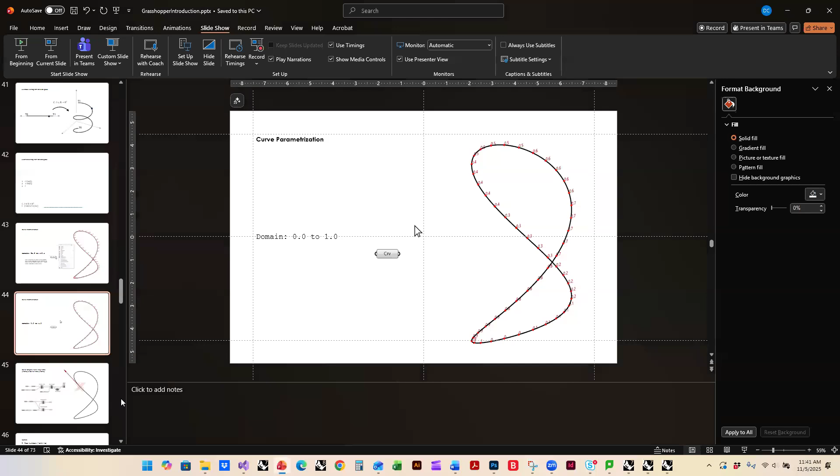Okay. Any questions about that? I think we only have 4 more minutes. So just to let you know, I probably will skip it right now. But the other thing that's important is to think a little bit about vectors. There's a small amount of math that you have to remember, and it has to do with vectors. So I'll probably say it now, and then I'll say it again at the start of next class because it's important, and I think it bears repeating many times.

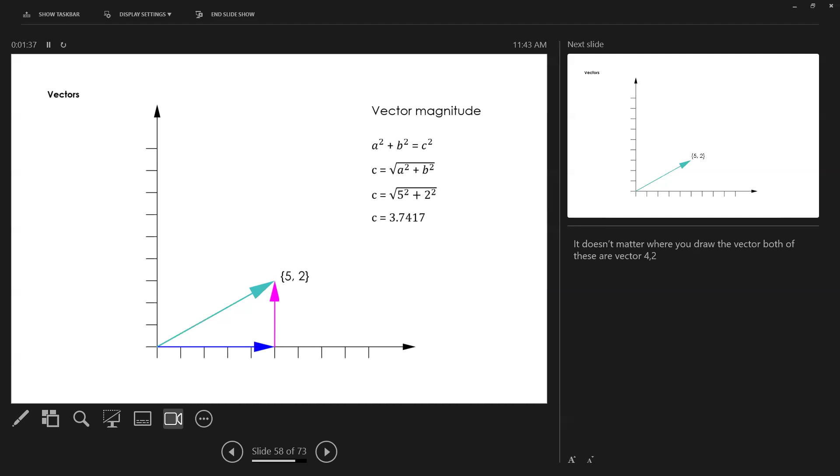A scalar is just a single number, and they can be plotted anywhere on the number line. And a vector, what we learned about in physics, is a direction and a magnitude. It has 2 components in 2D: 5 along the x, 2 along the y. And it has a magnitude which is calculated using the Pythagorean theorem. And you can plot a vector anywhere, and it is still the same vector.

So this is important. There is one thing that you need to remember from your education in order to start doing computational design, and it has to do with vector arithmetic. It's the only thing we have to remember. You can forget calculus, but vector arithmetic and trigonometry we have to remember. So I will go through it again next class. I'll go through the dot product and the cross product and all that jazz, because unfortunately it's the only bit that we must remember.